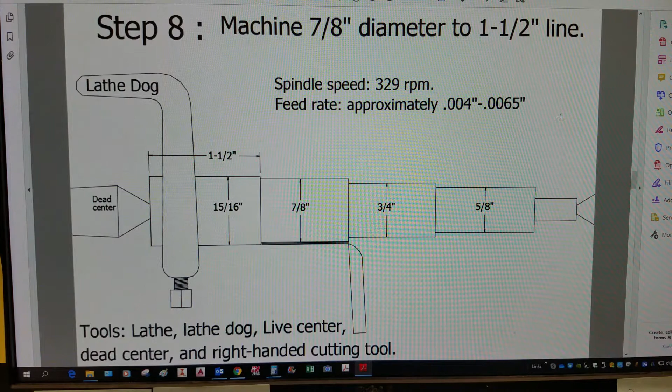Okay, we successfully machined the 7/8 diameter on the lathe. So our next step, step 9, machine 1/8 inch wide grooves to the depth shown. So we got a 3/4 inch that's supposed to measure a 3/4 diameter, and one of the grooves is supposed to be 5/8 diameter. Now we put those grooves in there so we'll have a place to stop our threading tool when we thread those diameters, the 3/4-16 and the 7/8-14 threads.

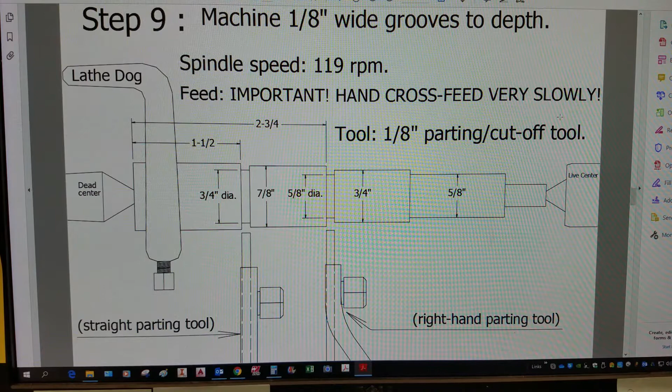So let's go to the lathe. Oh, by the way, I'll be using the right-handed parting tool because that helps me. If I use a straight, there's more of a chance for my dog hitting my tool or my compound. So I'm going to use the right-handed parting tool. That will let me get a little bit closer.

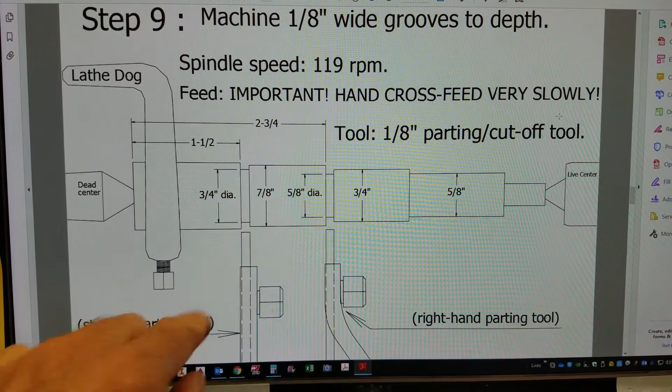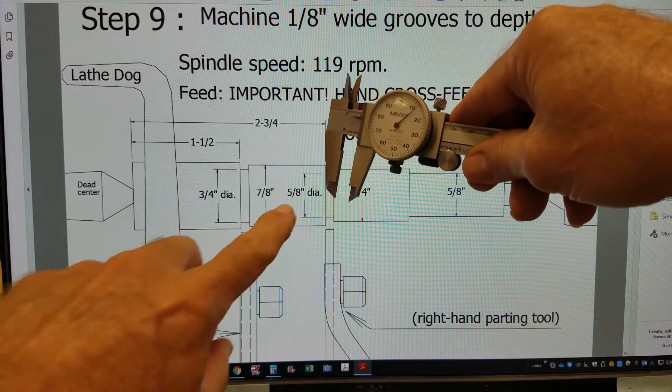Also, we're going to measure the 3/4 diameter and the 5/8 diameter with this portion of our dial caliper, because it's thin here in this area right on the tip, and that will allow you to get in the groove. We don't want to measure with the wide part. We want to get in there. That's what that's for, to measure grooves. So, all right, let's go to the lathe and do that then.

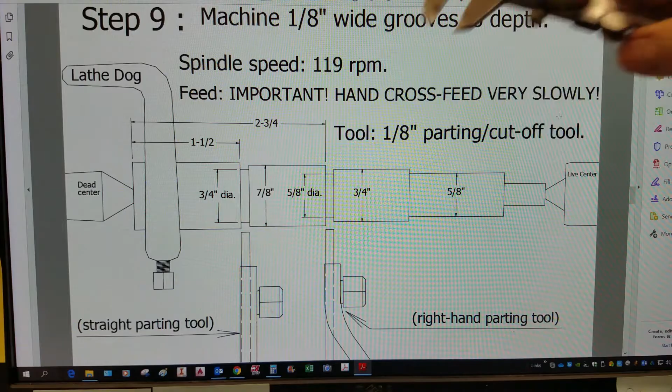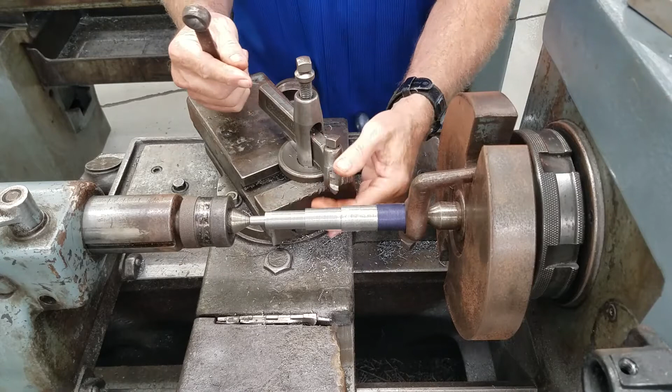Okay, let's change out our cutting tool. I'll go ahead and take my cutting tool out while that's tight. Take my left-handed tool holder out. And this is our grooving tool. I want to clamp as close as I can to my support. You don't want it sticking way out here because it requires a lot of pressure. So you don't want it sticking way out. You want to clamp as close as you can to your tool post.

And you want to move it this way too, so your compound won't hit your faceplate or your dog. So also, just like your cutting tool, you want it on the center or slightly below. So I'll use my dead center and put it right there. And I want it 90 degrees, just by eyeball. Clamp it, check my tightness. Okay.

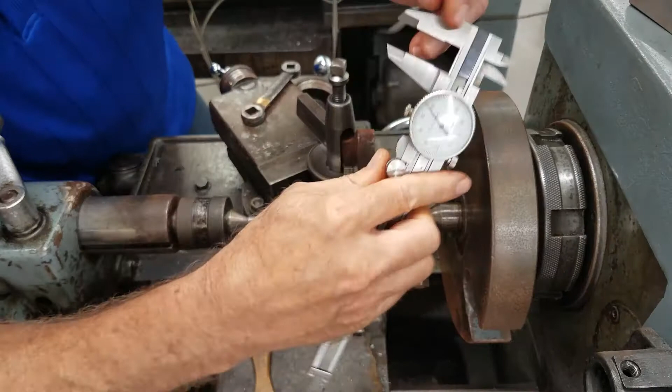And I'm going to go in, and in this case, I'm going to stop on 25. 25, I got to remember 25. So measure with the small part of my calipers, this part. Get in the groove. I'm measuring about 840, rather, 842. So if I go 100 thousandths, that would be 742. So I'm going to take something less.

I could probably take 90 off and be good, but what I'm going to do is go to, see, that's my 25 mark. I'm going to take 25, 50, 75 thousandths. Let it fuzz out.

So I stopped on 100, and that's about .768. So about 18 more thousandths. So I'll go past 100, about 18 thousandths. I'll just go ahead and go to 20 thousandths. Let it fuzz out. Measured about 748. It's good enough. Now I'll come over here and do my 5/8 diameter.